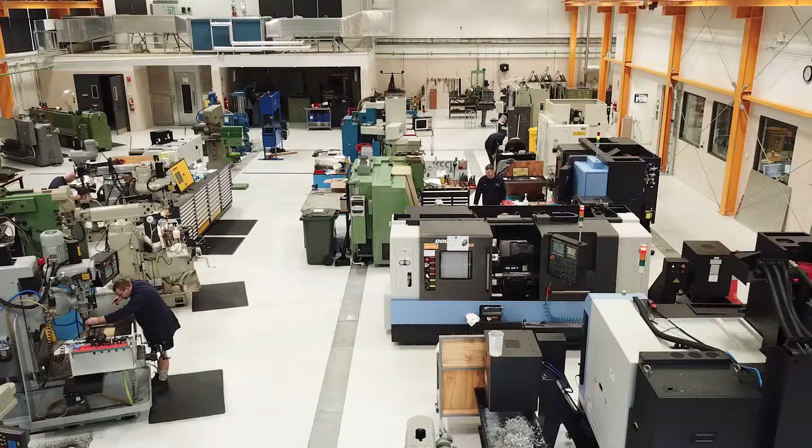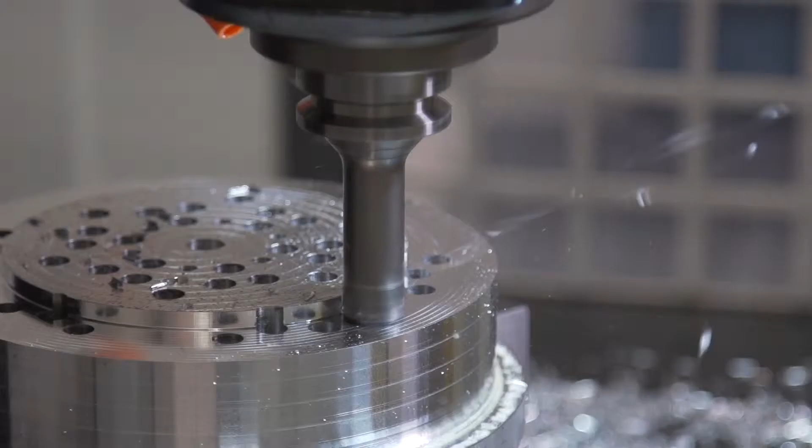My name is Eva Håkansson and I'm a lecturer in mechanical engineering here at the University of Auckland. I started teaching in January 2018 and I teach CAD to our first year engineers. Starting this year we are going to Autodesk Inventor as our CAD program of choice, which was the obvious choice for something that is user-friendly and suitable for all students.

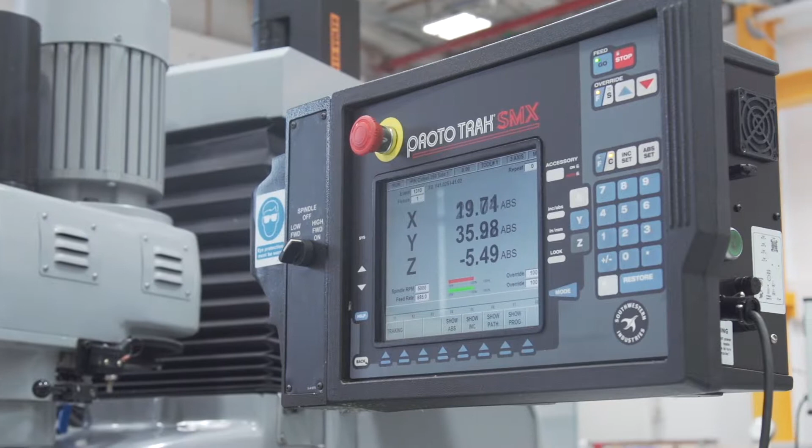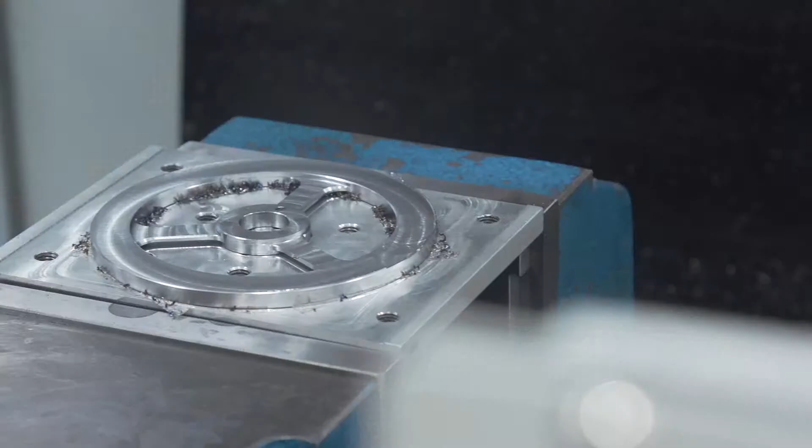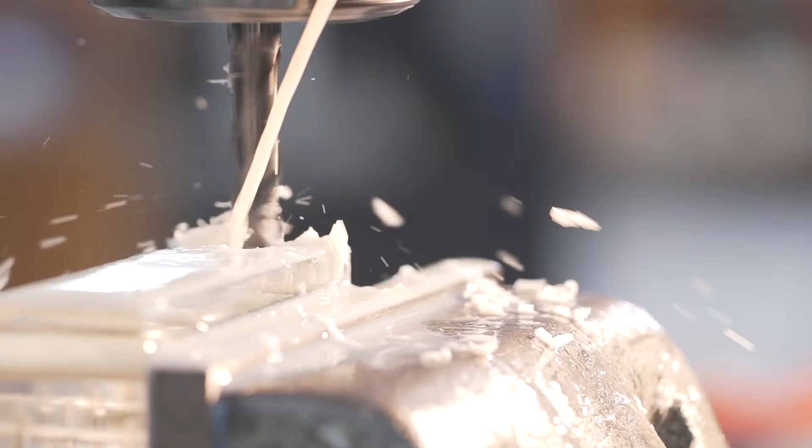With the wide range of skill sets we've got here and the wide range of equipment, it's allowed people to go from using the manual machinery through to using HSM to program a machine which is kind of between a full-blown CNC mill and a manual mill. It gives the guys the confidence to develop their skills in programming using a machine that's not as scary as a full-blown CNC mill.

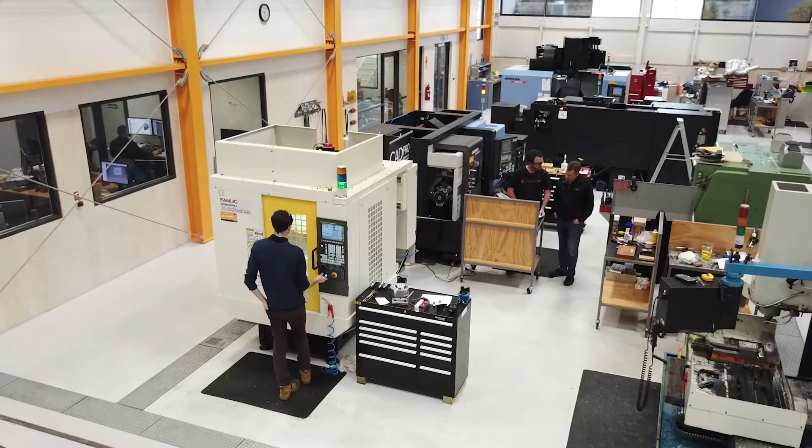One of our goals in this shop is to give our users the best possible experience when we have to make their parts and solve their problems. If we can leverage Autodesk's product design collection and associated software such as Vault to make that process as seamless and user-friendly as possible by integrating the smarts that are there, then that would be great.

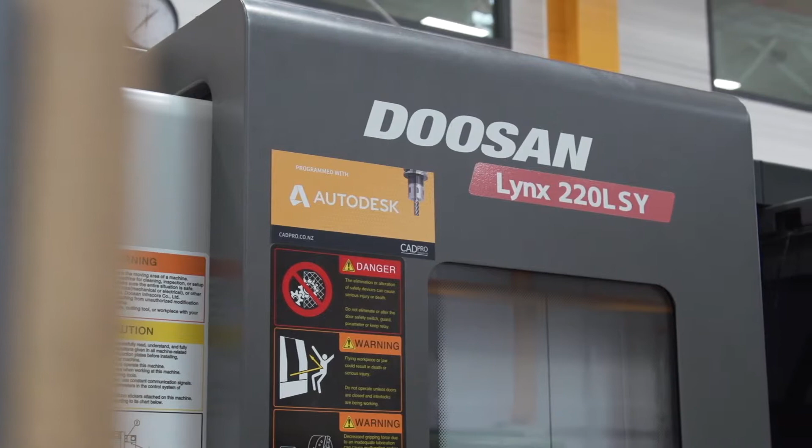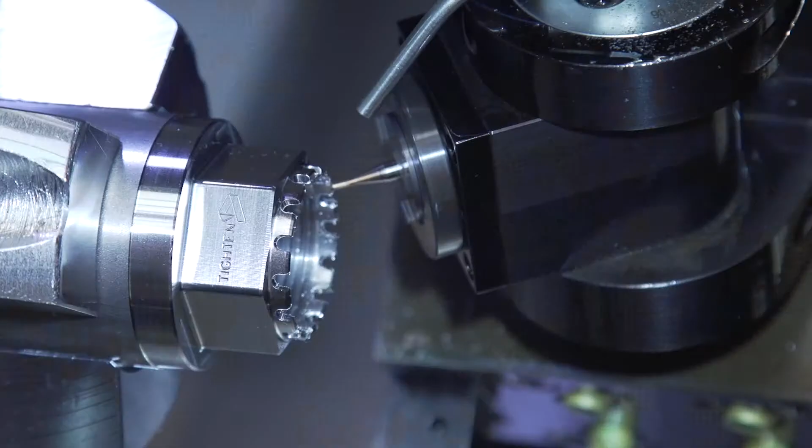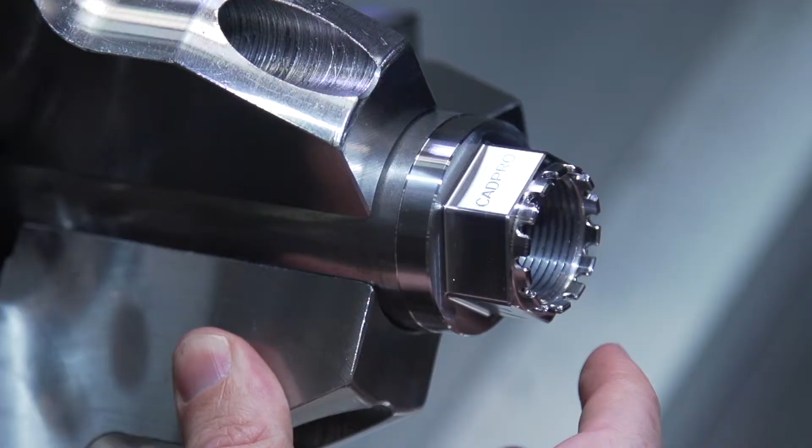I think Inventor is really good. It's been the best package I've found. I like it because it's simple, but it doesn't take away any advanced features that you want. Most recently, because I've been doing a bit more advanced stuff now that I'm at uni, I have been using the forums and stuff. They're really great, and I've asked like 3 or 4 questions on them so far, and I always get a really good reply really quickly, so it's a great tool for me.

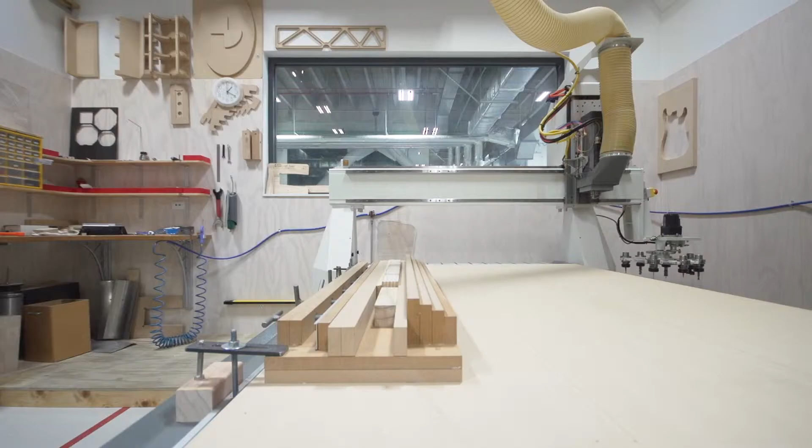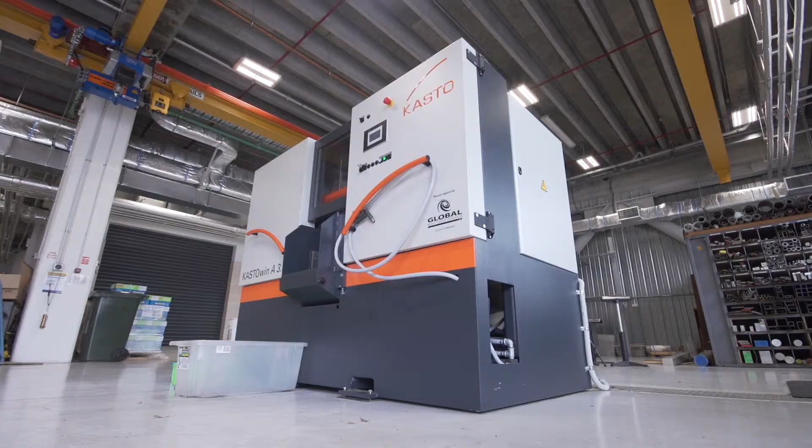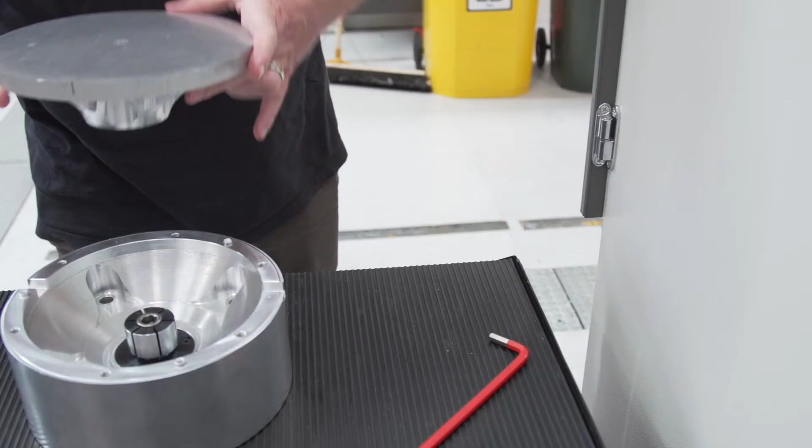On average, for the past 4 or 5 years, we've been doing about 700 to 750 individual jobs per year through this workshop. Every single job is drawn up in Inventor, and we make sure that we capture the knowledge during the phase of manufacturing that job. We capture that knowledge by modelling the setup as accurately as we can. We have machine models, we model our subplate, we model the 4th axis. We know what each setup looked like when we were machining parts and feed that back into our data management to make sure that we can make the parts better in the future, should we ever need to.

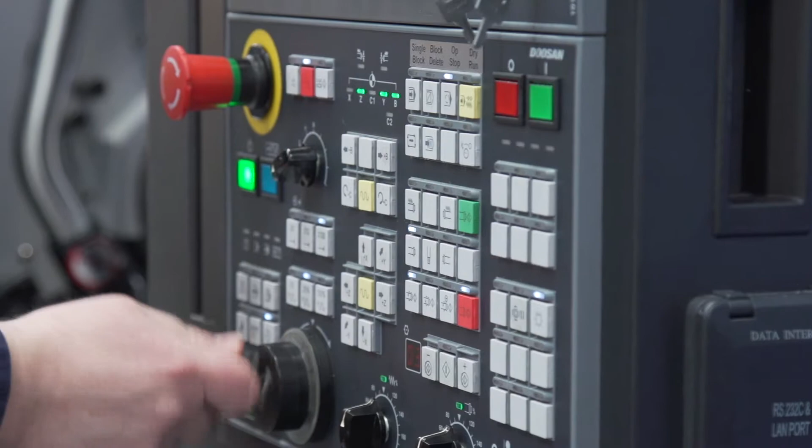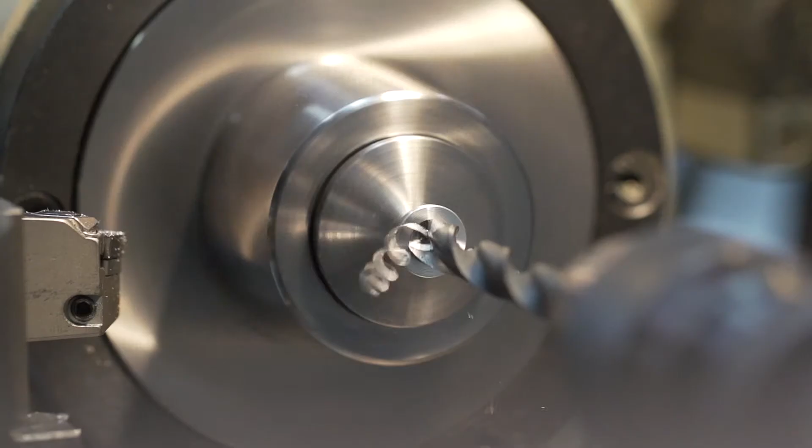With all the changes that have been happening in manufacturing and the advances that everybody's going through to try and keep up with technology, one of the biggest challenges for us is upskilling our staff. We've tried a few other software packages, and the learning curve has always been quite steep and sometimes out of reach for some people. Having Autodesk software here in use has certainly made that process easier for us, and we've seen great improvements in the last few years.